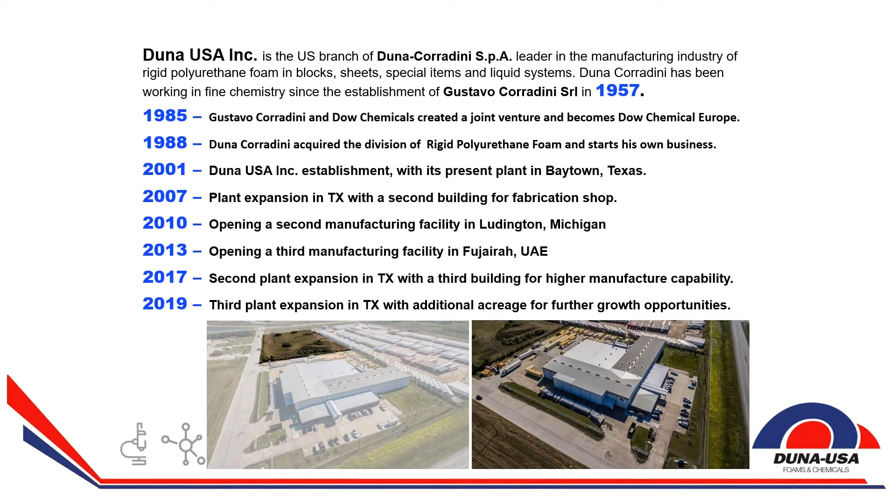We were started in 1957, and in '85 joint ventured with Dow Chemical. We are extremely known and knowledgeable in the foam industry. In 2001, we came to the United States in Baytown, Texas, where we've been ever since in the US. In 2007, we put a second building in. In 2010, we have a second location in Ludington, Michigan. We have a plant in Fujairah, United Arab Emirates. So that gives us one in Italy, two in the United States, one in the Emirates. And so we do have worldwide capability. Our map just shows that we like to think everywhere, and certainly in the major petrochemical parts of the world.

With the basics out of the way, let's get into what we're really here to talk about, and that's the rigid foams of our products. Most of you are familiar with the 2-pound polyisocyanurate foam blocks that you fabricate into pipe insulation.

The main densities on that are 2, 2.5, and 3. We show 3.4 on the sheet, and we'll get to that in a little bit.

One of the big questions, and certainly a common one right now, is why the 2.5 pound foam has been specified on LNG plants. It really started in Europe with the 50 kilogram per cubic meter, which is about a 3.2 pound density. It was a compromise in North America not to spend the money on the 3 pound, and the 2.5 was close enough in performance.

So that is why you see the 2.5 pound on big LNG plants being specified more and more. It was the closest to the 3 pound and gave everybody a bit of a price break in the overall cost, and that's something the industry has settled into.

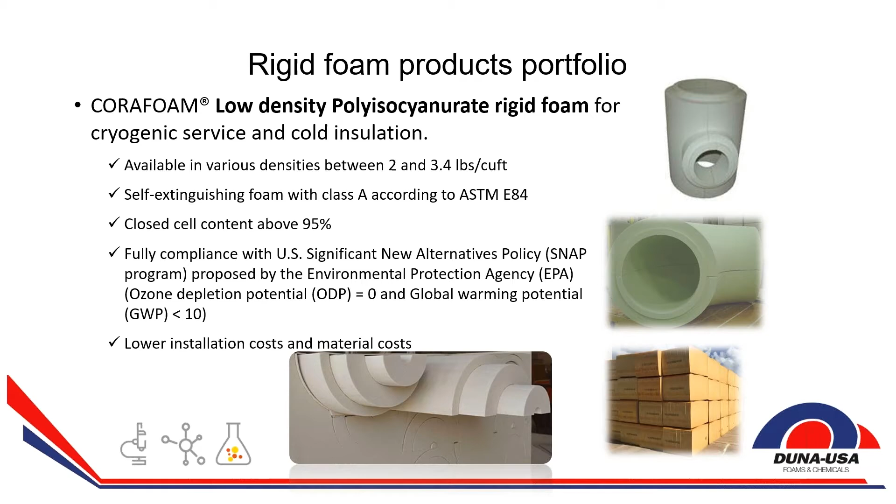As we get into mechanical insulation guidelines, we're often asked at what point do you start double layering or triple layering. Our recommendations, which are industry common practice, are: cold insulation below 2 inches is a single layer (an inch to an inch and a half, up to 2 inches). Between 2 and 5 inches is a double layer application, and anything above 5 inches becomes triple layer. The triple layer becomes important above 5 inches because the application is getting colder and colder.

You get to a point where the shrinkage of the insulation is greater than the steel itself, and that first layer can almost be sacrificial—it's going to shrink more than the steel. So you need layers 2 and 3 to provide the actual insulation value at the cryogenic level, to make sure the application stays within the required temperature.

Between each layer, we recommend using a joint sealant, and there are several to choose from. We have Foster's 9550 written down, but we do not tout them—we don't have a partnership, so any recommended joint sealer would be perfectly fine.

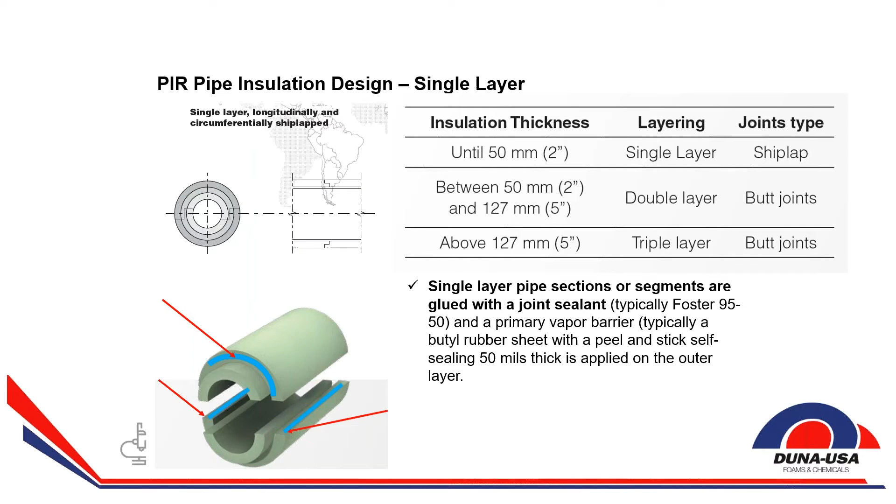On a triple layer design, as stated, the inner layer is often sacrificial, so there's no vapor barrier requirement there—it will shrink but not go away, and will have some effect but will move on you. The secondary vapor barrier is between the second and third layer, and the primary vapor barrier is on the outside, before the metal cladding or jacketing that forms the actual protection of the assembly.

Let me back up—I left one thing out in the upper left corner. We need to talk about staggering the joints. It's common and known, but we want to stress that it's best to turn everything 90 degrees from one layer to another so you have no chimney effect. Each joint is protected by the next layer, with overlaps where materials butt up against each other. The idea is that nothing has a direct line from the piping to the surface—you want to trap the cold temperature where it needs to be and keep the heat from the outside away.

That was the basics of mechanical insulation on piping. Rigid foam products are used in several different applications. The lower densities—2, 2.5, and 3 pound—are used in everything from mechanical piping to the cold chain industry, meaning refrigerated trucks, panel systems, refrigerated buildings, and doors. Anything looking for a high R-value typically uses a low density polyiso or polyurethane in an assembly to give it strength, and from there you make a large cooler, so to speak.

As we move up to higher densities—8, 10, 15, 20, all the way up to 31 pounds per cubic foot—you get into pipe supports, thermal breaks, and tooling applications. Then we have a Corintho line at 700 and 800 kilograms per cubic meter, about 63 pounds per cubic foot, more for specialty products like aerospace tooling and machining. You use it to make models of things that will be carbon fiber based.

We don't deal with those in the mechanical insulation world a whole lot, but they are there and they do have a higher temperature rating, getting up into the 400-degree range. But before we talk about them much more, they have a board foot cost of $23 a board foot, so those high compression materials are certainly expensive and really niched to specific industries.

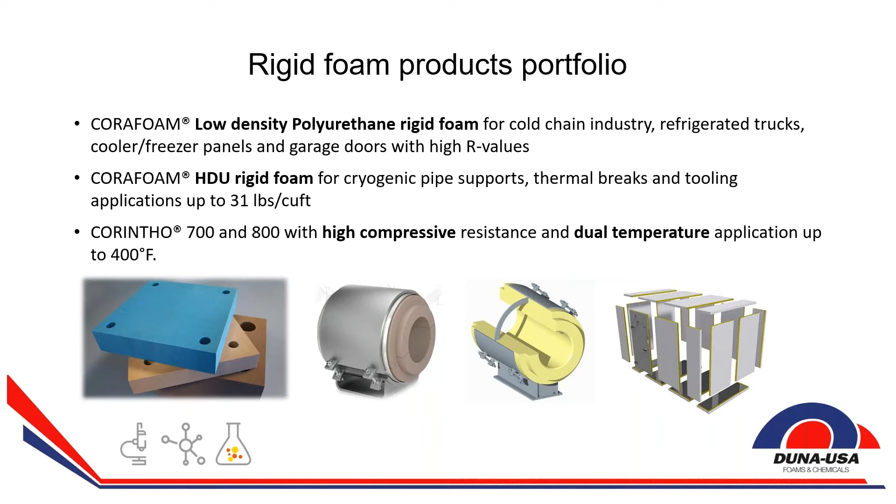I don't see the slide yet, though, Chris. Well, I just have the same thermal break one up. Oh, there we go. Pipe supports. Yeah.

All right, so we can do this several different ways. You can do it with conventional foam, which is rigid foam that you cut into half sections, like you see on the right. We also have liquid systems that pipe support manufacturers build molds from, and they mold out curved segments as opposed to fabricating pieces out of rigid foam. It's six of one, half dozen of the other. Some prefer the liquid systems, but we can supply both.

They are common. There are big companies out there you've certainly heard of. Piping Technology deals with the molded type of systems, and we know several of your branches cut our blocks. As Dave said, six of one, half dozen of the other, either seems to work just fine. The idea is that larger diameter pipe supports need higher densities to handle the weight. We can support material up to 31 pounds, and all of the pipe support designs and sizes can be met with one of these two ways. It's certainly well accepted within the industry.

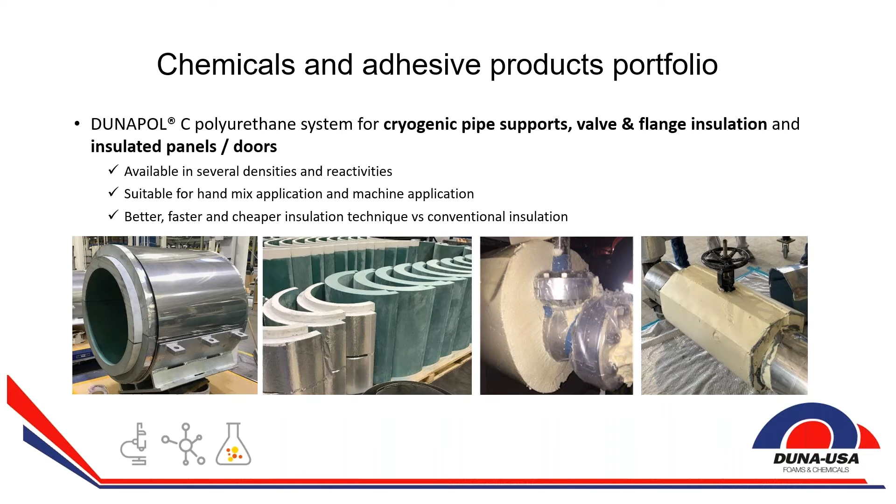If you go to the next slide, Chris, there's more pictures. So the process is using liquid foam to insulate an item as an alternative to conventionally insulating it, and that has a lot of features and advantages over conventional insulation.

In new construction, if you have a high population of valves that need to be insulated and you choose the injection method over conventional, you're looking at a labor cost differential 10 to 15 times greater to do it conventionally than with foam injection.

The process is simple. You determine what the thickness needs to be, calculate the volume of foam required using an Excel-based configurator we have, build the box which is on the upper left, fit it to the adjoining pipe, inject foam, and then walk away because you've just insulated that item.

People often say something has to be better, faster, cheaper for somebody to change, but you can only get two of those three. The reality with this system is you get all three, because it's faster, it's substantially cheaper, and I contend it's better. There are no seams, no gaps, no joints, no mastics, no glues—it's one big solid mass of foam.

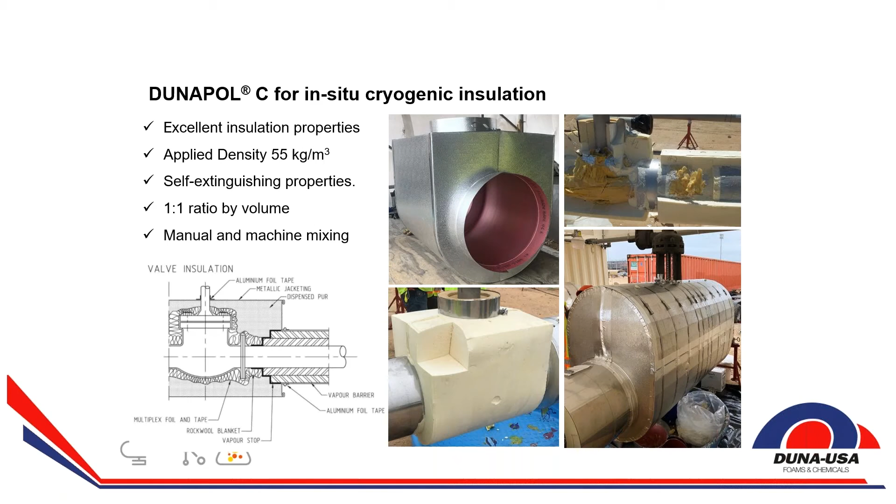So all that's factored in, so what you get is a picture like the bottom left that has no cracks, no voids—even under operating conditions, it looks just like that. And I want to make sure we fully engineered these systems to do what they're supposed to at the cryogenic temperatures.

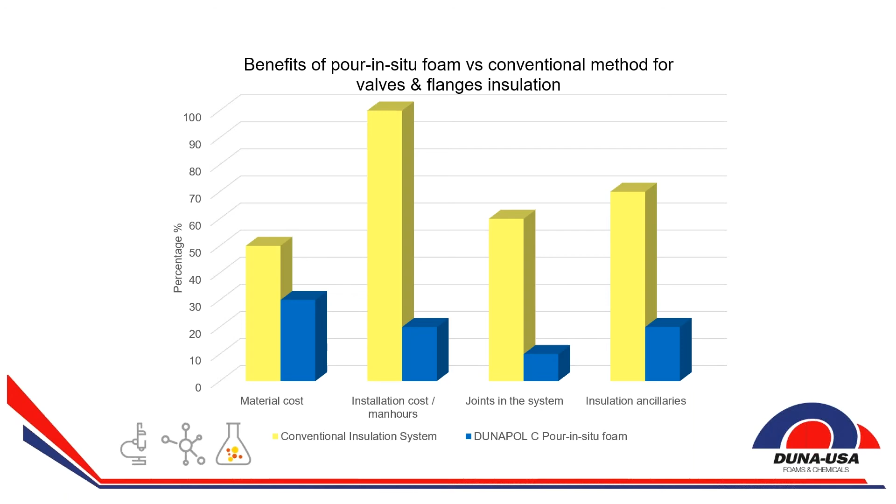All right. Going along with the foam in place valves and flanges, sometimes you guys will hear about pre-insulated pipe. We have a product offered more in Europe than North America called Spin Pipe, but we're not the only ones that do it. Permapipe out of Nashville, Tennessee is certainly one of the big players everyone is familiar with, and they do pre-insulated pipe systems, everything from fiberglass, mineral wool, to polyurethanes.

Quite familiar with what they do, and the concept is the same: if you've got 40-foot sticks of pre-insulated pipe, the labor savings is immense. But on each one there's a cutback of 36 inches for welding. So don't think that because something is a pre-insulated pipe job there won't be places that normal fabricated insulation will have to go. It will fill in all the gaps, the butt joints, the welds. So you're not left out of those jobs at all, even if it happened to be pre-insulated from some other system.

The quality of the product, we've got nothing to say about it. We don't do it here, but those systems are quite efficient and quite popular in places requiring 30-year thermal loss protection. But just don't think you're out of the game on those jobs. There will still be a good bit of mechanical fabricated pieces and insulation that go into them.

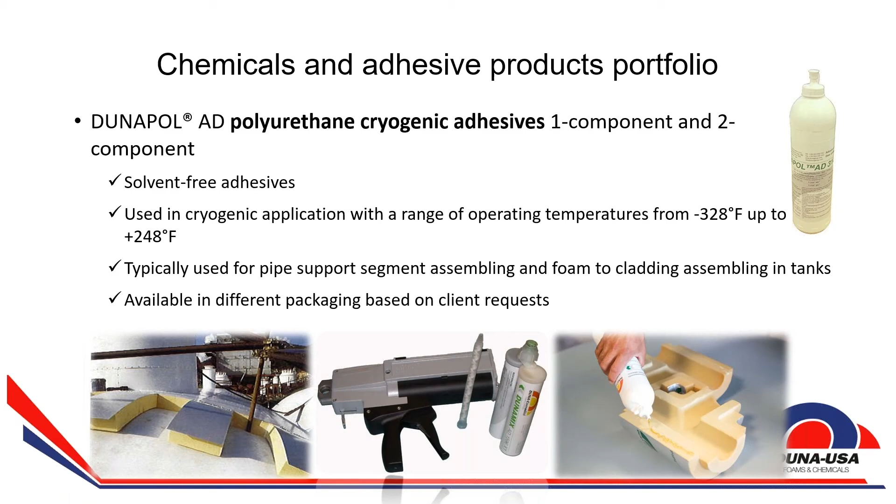Would you like to talk about some of the Gulf ones, Dave? Yeah, the list has actually grown since then. What I've told people is DUNA is a worldwide recognized name and often shows up with foreign companies, like Toyo Engineering or Chiyoda. To them it's been a go-to for decades. And as those companies do more and more work in the US, what's called the European spec, the DUNA Corradini European spec, will show up in US specs. It's a well-known brand name globally.

We do have one question, and part of this question is about pricing. So in general, if you would contact your local DI, or Crossroads branch or representative if you're in Canada. The pricing does vary depending on where you are. So reach out to your DI branch and or Crossroads branch, and they will be happy to work with you and get you a quote.

The other question is: how do you decide if we need to inject liquid PIR, PUR, or use rigid foam for pipe support? How do you know when you should? How do you decide if you need to inject versus doing the regular rigid foam?

That will typically come from your pipe support manufacturer. He may have a preference. He may have molds in place that he already has for pouring the support, or he may elect to cut it out of existing rigid foam, or he may have the ability to do both depending on the size. Obviously, with a block of foam, you can cut any size you want. If you've invested money in molds to pour those things, I don't think you have an unlimited number of pipe sizes and insulation thicknesses.